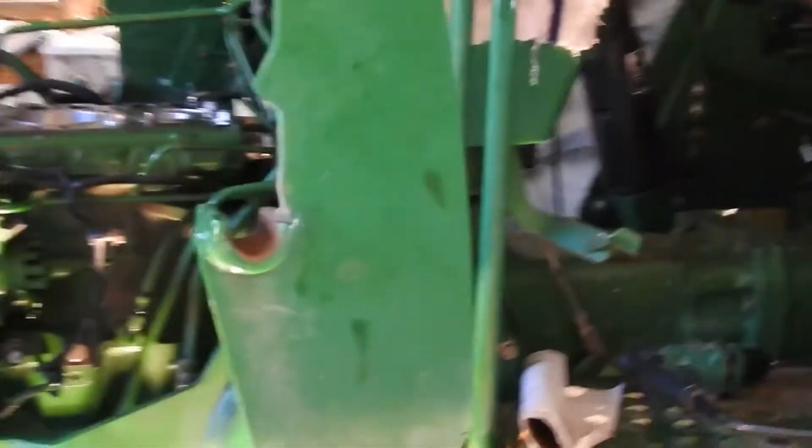Alright, well, anyway, back here working on the tractor, the 5065E John Deere, in the middle of an engine rebuild. Where I am now is that I'm putting the pistons in. We got the liners in. Time for the pistons. I already have 2 pistons in. As you can see, I got the number 3 in, and I got the number 1 in, and I have bolted them down on the underside. I'm going to do one for you.

As you can see, I put these bolts in here. They're only 1-inch bolts, but if you get a washer, you'll see a lot of guys online tell you this, and that's where I learned it: you bolt these down, just snug them down, and it basically keeps the liners in place, because below you have to turn the crankshaft to move it away from where you're putting the piston in. You got to turn these, so it could push out one of the liners. So they just recommend that you put in bolts just to keep those liners down.

You can see the washer actually just goes over the liner there and there, there and there, there and there, over here, over there, and over there. So these aren't coming out. I coated the liner with oil. I've already done that. And so we're going to go over and prepare a piston for insertion.

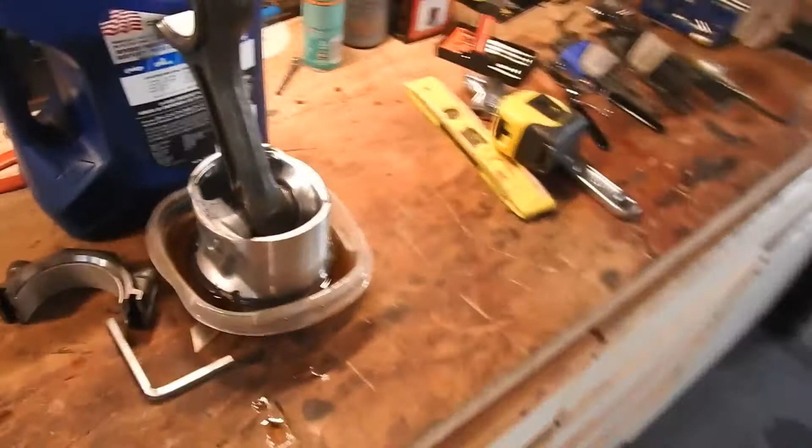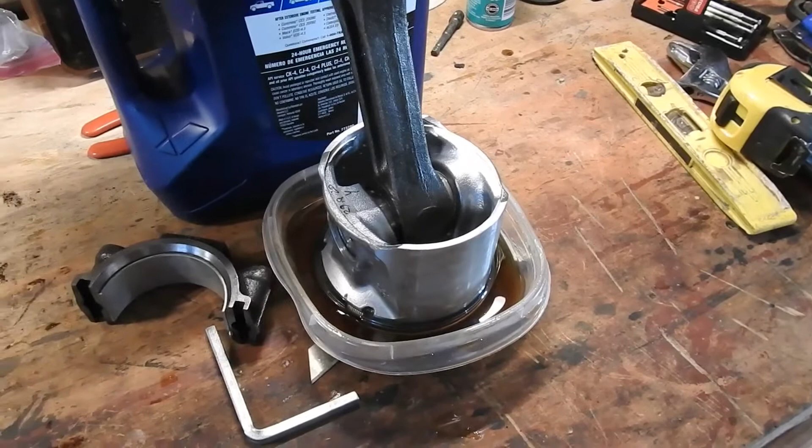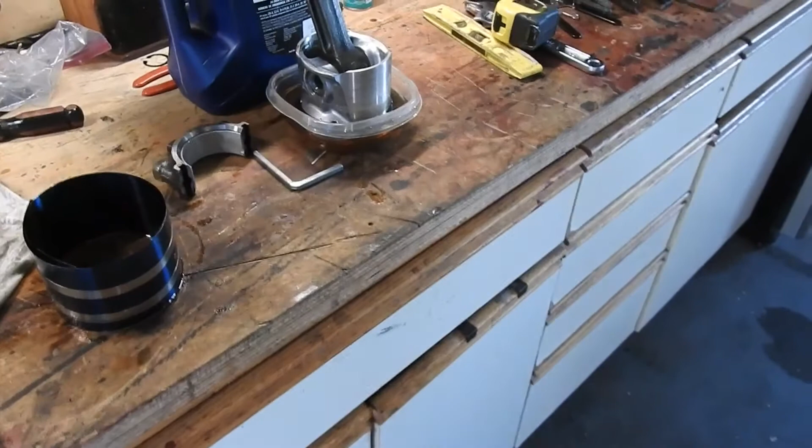So what you can see here is I do have the piston. That's the number 2. I have it soaking in oil. I have the rings soaking in oil. Some old timer told me to do that, or I saw it online, so I'm doing it. I have already changed out the piston. The piston is new. The guide is new. The shaft is existing. The end piece is existing. The bearings on here are new, already done. So that's soaking, okay?

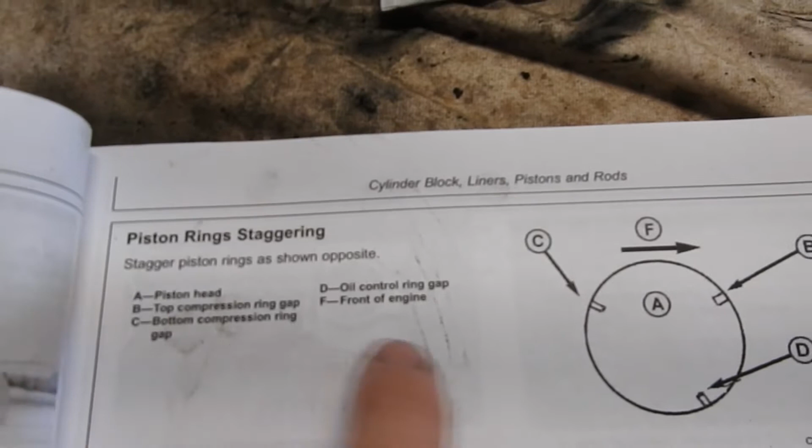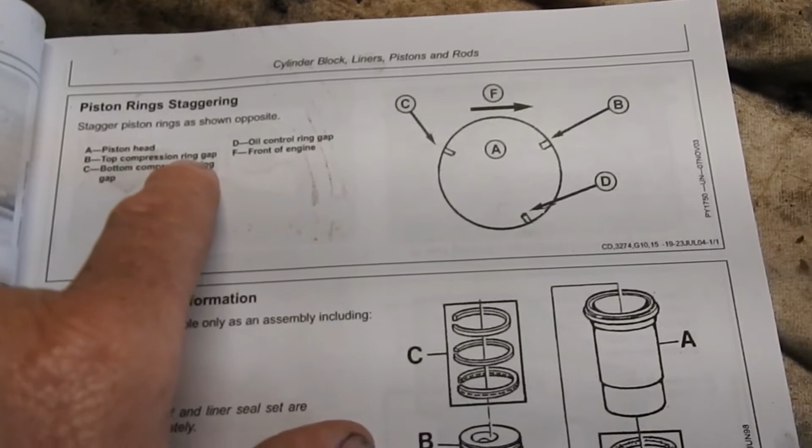One other thing I'll mention is back to the book. It says piston ring staggering. Not drunk staggering, but staggering as offsets. So what they say here is the piston head is A, obviously. B is top compression ring gap. Looking at it from the top with the piston facing front, as in front of the engine, they want you to put the ring gap here, and then the bottom ring gap, because there are 3 rings, on the opposite side, and then they want the oil control ring to be down here. You want to stagger them.

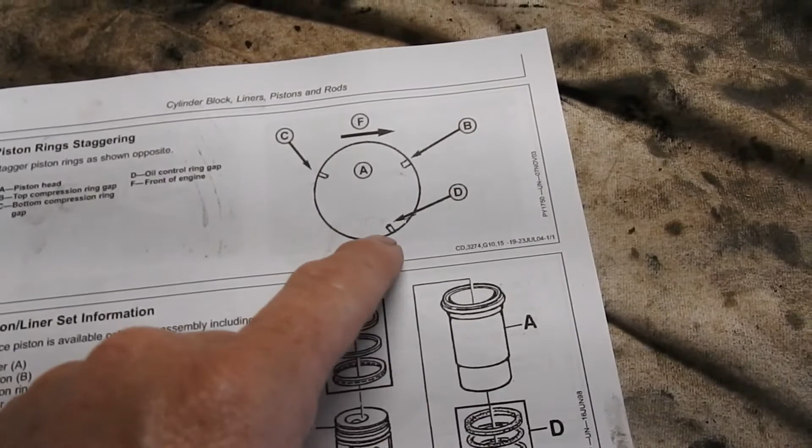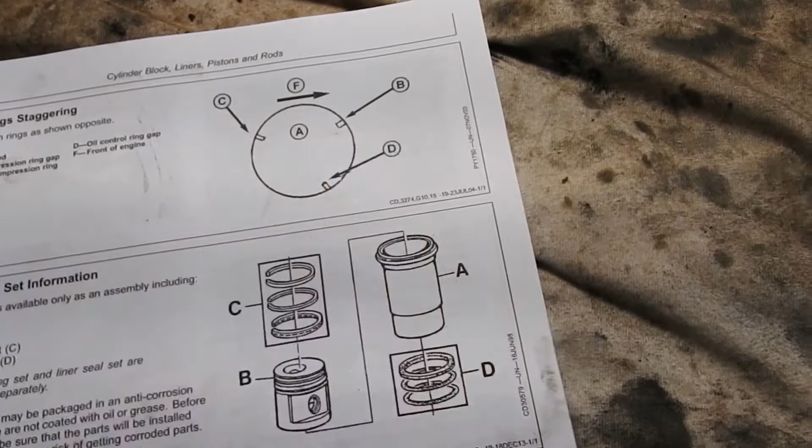It makes sense, right? Because you're compressing air in the piston. You want these things offset. So that's how they do it. Notice the guide would run right through here. You don't want to ever put these right above the guides. That was something that was recommended. So that's how they're offset, and that's how I'm going to do it, and you'll see me do that.

And then I will put it in the piston compression tool. These are like $10. I got this on Amazon for $10. It works pretty well. And then we'll come over here and we will get it in there and tap it in.

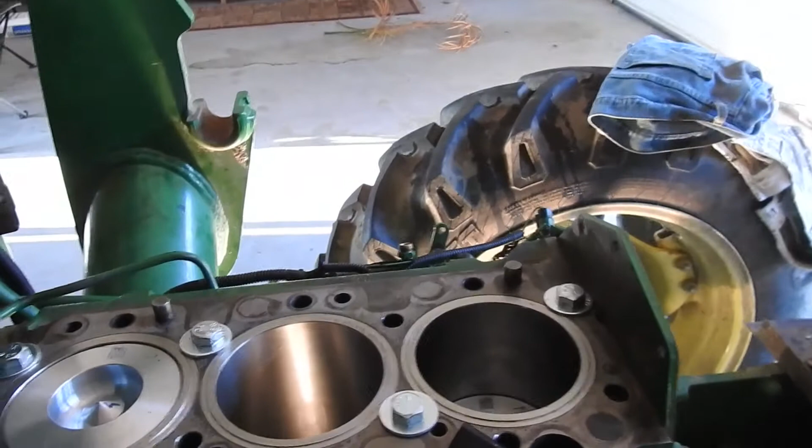First thing I want to do is, if you look in here, I took the tape off the crankshaft. It's called a rod journal. I think before I was calling it something else, but that's the crankshaft journal that accepts the number 2. You can see it's pushed. I want to push it down a little more.

So I'm going to get my crescent, or my ratchet here. Okay, where's my socket that I like? Here you go. This is the socket. Get the socket here. Okay.

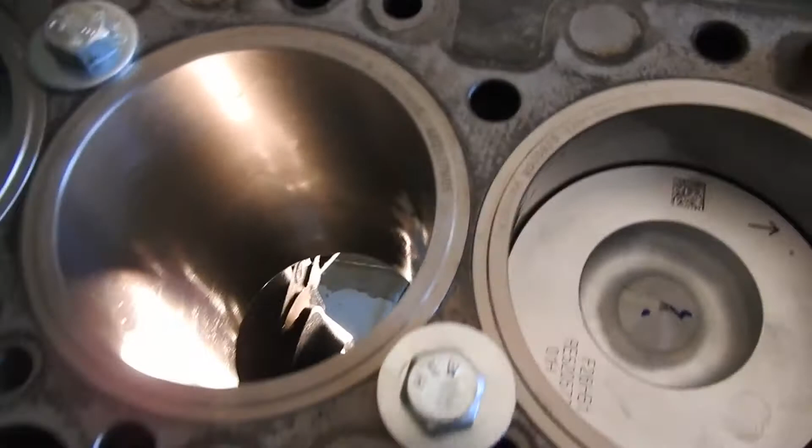Alright, I'm gonna put this on the front so I can turn the crankshaft. Okay, so I'm just gonna look in here and figure out. Keep turning it. It's coming up and around. I want it to be all the way down because I don't want my piston shaft to go down, and then I'm trying to pound the rest of the piston in, and it's banging into that. So I want that down as far as possible. Let me see if I can get it a little more. There we go. All right, that's pretty far down there. Okay, so done. Got that out of the way.

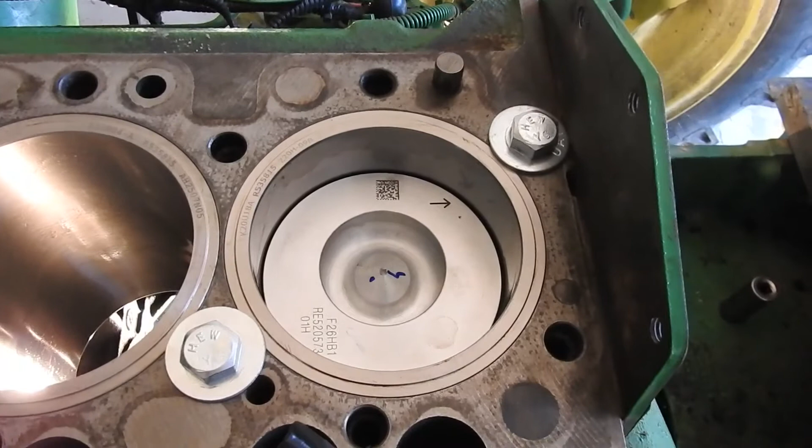Okay, I did the number 1 and the number 3 already. The number 1 was a little more of a pain in the ass because the oil pump is in the way, and I didn't want to take it off down there. So anyway, I figured I'm going to show you guys the number 2 just because it's the easiest to get in, most convenient. So let's go back over here. So I have that prepared now. Took the tape off. I cleaned off the glue from the tape with some brake cleaner and got that done. So we're in good shape there.

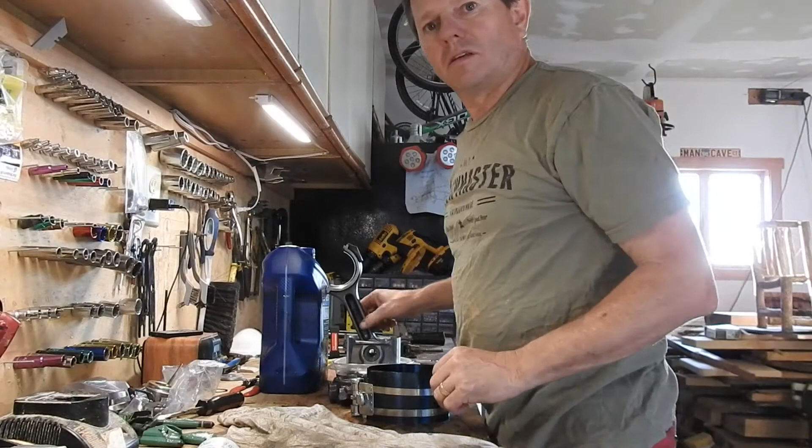So, all right, let me get the camera set up just right here. Hopefully I can prop that up. Okay. Can you see me? Okay, I think you can see me. Okay, so here we go.

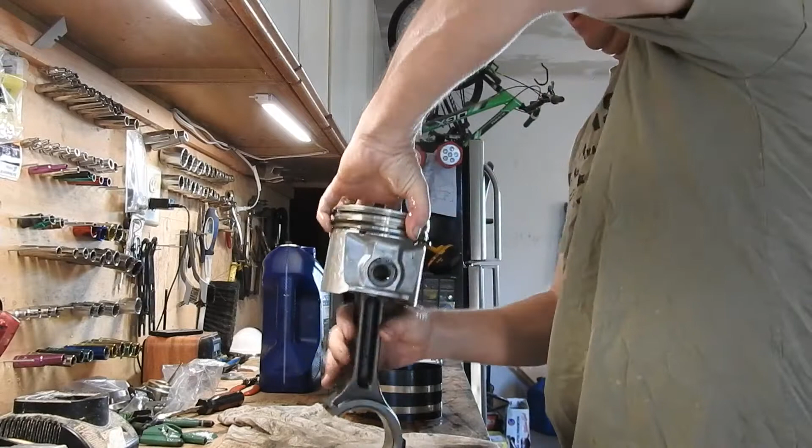I'm going to take the piston out. We are going to let that drip dry for a minute. Get some of that oil off of there. You know, it's good to take a little bit of that and just rub it on the piston itself. Just get a little bit of oil on there. Get that ready to go there. Okay. Now, I'm going to position this piston just like in the manual. Front is that way.

All right, and then I'm going to adjust these. Again, the top compression ring is at 2 o'clock. I'm going to put that at 2 o'clock there. The bottom compression ring is at 11 o'clock, so I'm going to turn that back. Okay, right about there. And then the middle one is down at, I'll call it 5 o'clock. So let me go turn that one down to 5 o'clock here. Just give me a second.

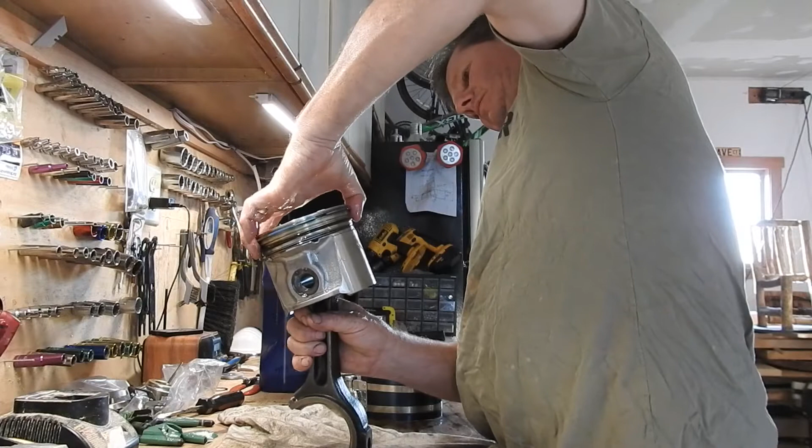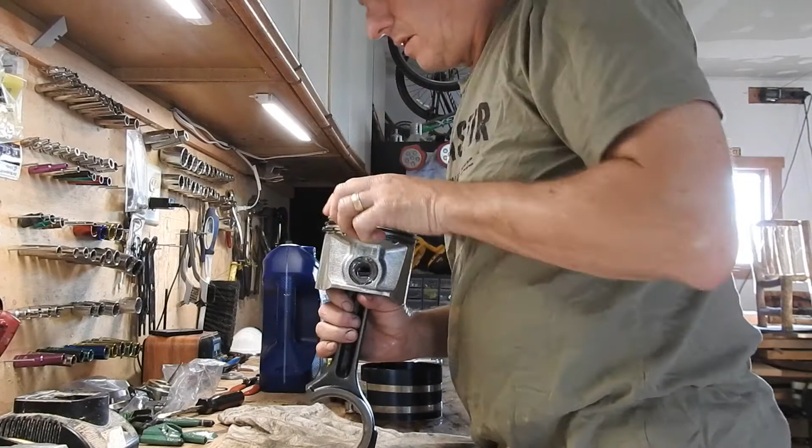It's 5 o'clock. Top one has moved on me, so I'm going to go 2 o'clock with that one. Right? And then the other one is at 11 o'clock. And it's facing towards the refrigerator over there for the front of the tractor. Okay, so that's good. So I got them in the configuration I need.

Now, what I'm going to do is just turn this over in my guide, or this is the piston compression tool. I'm just going to push on it a little bit to get that in there, like so. And then let's tighten that baby down. Try not to get it to turn on you because you don't want the rings to move. I'm trying to do my best to keep this in the same spot, which I think I'm doing here. Alright, so there you go.

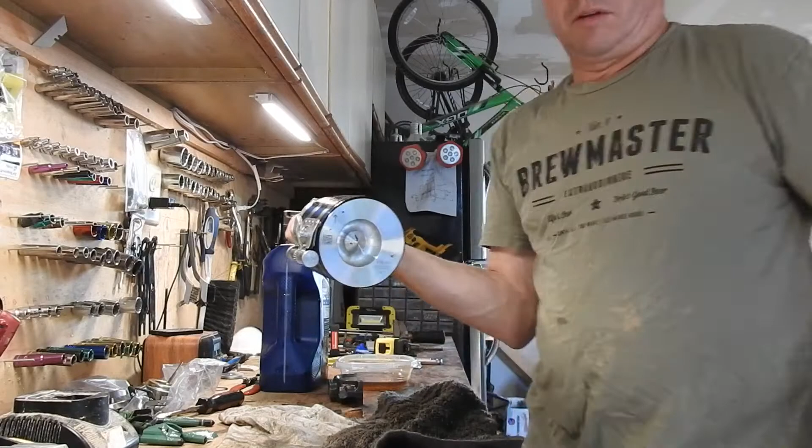Then I'm going to take a rag. I'm just going to clean off the top of this piston here. Alright. And I think we're ready to go. So let's go over to the tractor. You can see how that goes on there. Pretty simple. Tighten it down.

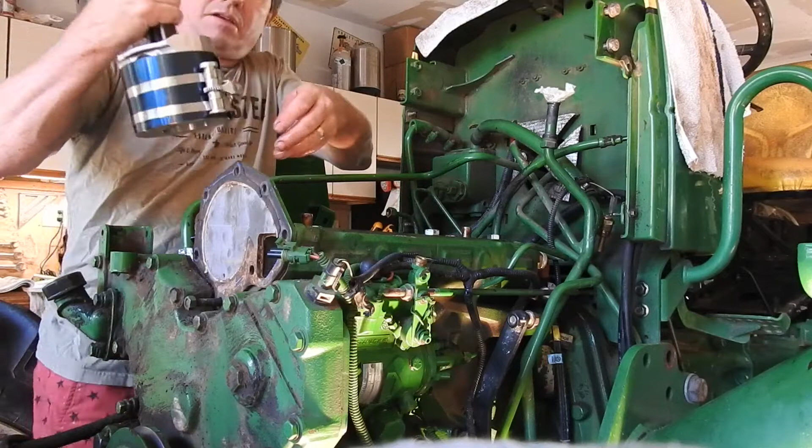Here we go. Okay. So, here we go with this guy. So I'm going to look at this. Which way is front? Okay. This way is front. So we're going to start her slowly in there. Just like that. Now it's just pretty much resting on the compression tool. It just sits almost perfectly over the piston.

And I'm going to, let me see if I can get you up a little higher. Maybe that's a little bit better for you. Okay. So here we go.

Just tap it. I'm also pushing and tapping at the same time, making sure to not pick up on that liner tool. It started to move on me a little. I'm going to tap it back down. Did it come out on me? Let's see it yet. Sounds like it did.

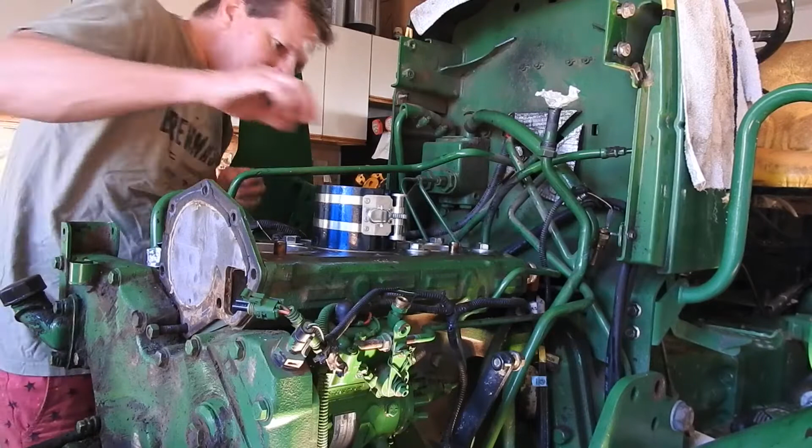Let me check underneath and see if it's touching something there. I don't think it is, but I'll look anyway. Nope, it's not. So,

well, look at that, a ring popped out on me. Yeah, the top ring popped out on me, so maybe, just maybe, I can keep this going if I can loosen this up just a touch. I'll show you here in just a second where that ring popped out. I'm hoping I can save this without having to pull it all the way out.

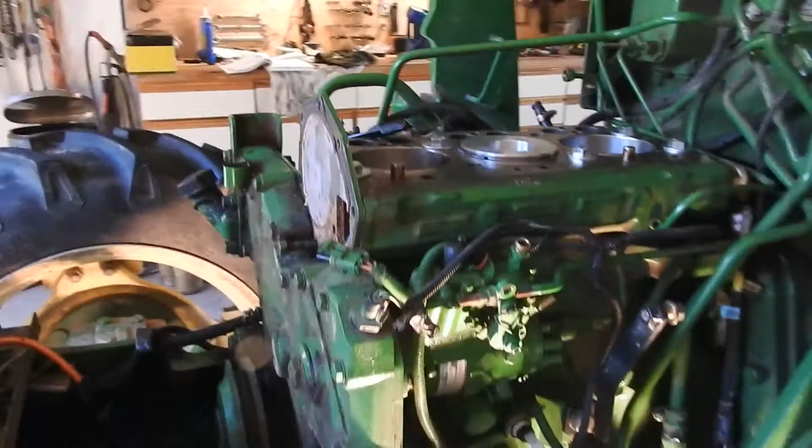See how that top ring popped out there? I'm going to try and compress that again and push it in. So let me try that. See if I can get her. If not, I'll just pull the damn thing out and get it again.

Loosen this back up. I'm going to push up on the piston a little bit to relieve the stress on the ring. There you go. So I pushed up just a little bit, and I just got to compress this one ring right here. Let's see if I can make this happen.

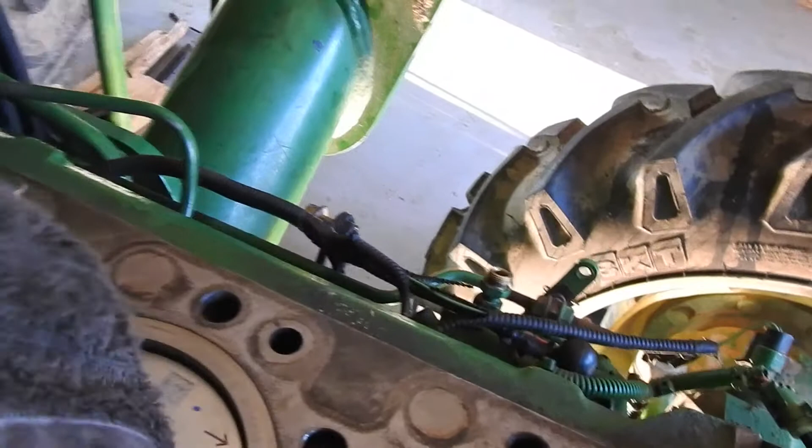Okay, let's see. Ha-ha-ha! Voila! Look at that. In she goes! Alrighty, let's check it out. So, I got it in there. See the arrows facing towards the front of the machine, all of them, right? And that is in. I will just grab a rag here, clean that up a little bit, get some of the oil and crap off of it there. Alright, looks pretty good. So we got it in.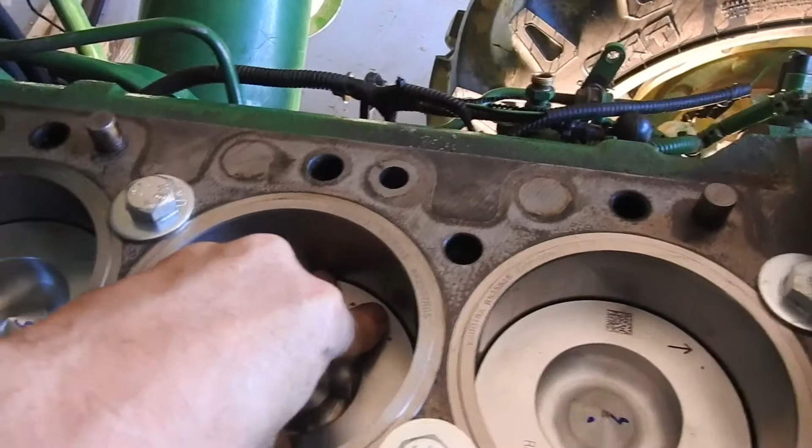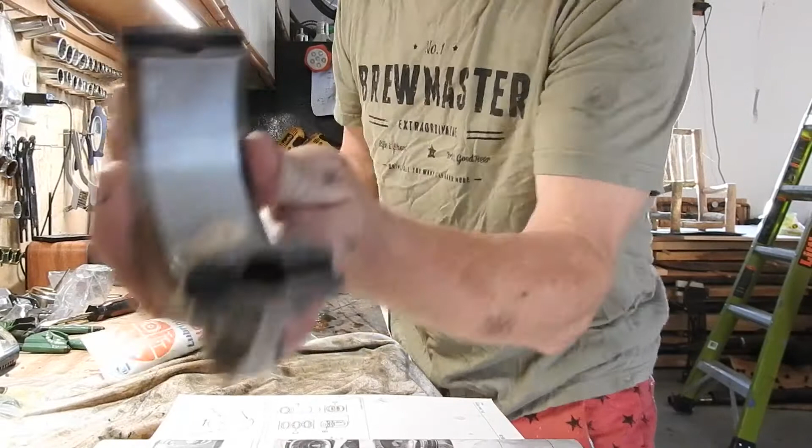Now we can actually take this and push it down to where the crankshaft is down below. Now I'll go under, we'll check this out and get this taken care of. So I'm going to come over here, grab this guy. What I will do is I will clean this bearing. This is a new bearing that's in here. I'm going to take my lovely lubricant. Where the heck are you? My Lubriplate 105. Just put a squirt in there just like that. And just spread that around.

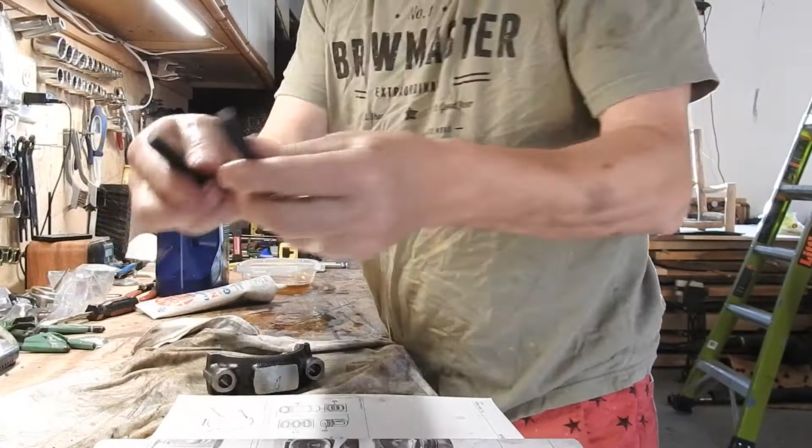Right? Next thing is to take my two brand new bolts, and I will cut those open. These are to hold the piston on the crankshaft. Brand new. And I will go underneath and we will install this puppy. Alright.

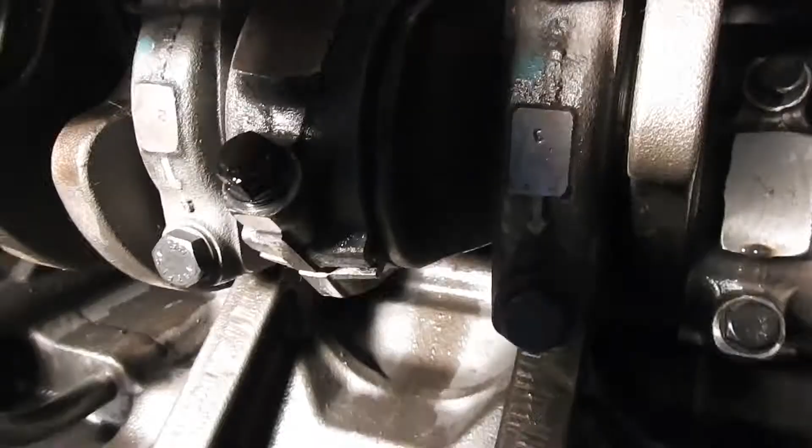You don't want to crank one down and not the other. You want to evenly crank them down over both grooves. That one's probably a little too tight, so I'm gonna loosen that one up because you want them both started in each groove. That one actually popped on a little bit. This one popped off, so they're about even. Now, if you start cranking them down, do a couple turns on this one, couple turns on this one. This will push in and the grooves will close. You don't want to just crank on one side though. Okay, so I'm going to get that done.

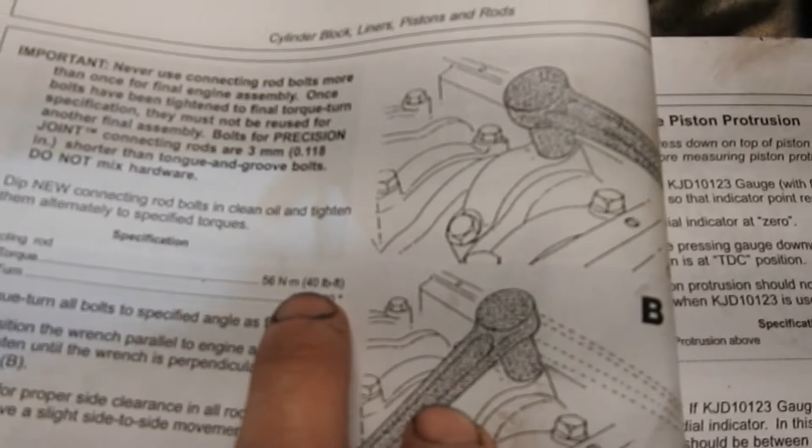Okay, now that I'm done underneath with the piston shafts and putting the caps and the screws on, I just wanted to show you one thing. Coming back to the manual here, there's a torque requirement for those bolts. When you're putting the pistons on the crankshaft, those 2 bolts, they're new bolts. 40 pound-feet. So torque the bolts down to 40 pound-feet, and then do a torque turn of 90 to 100 degrees.

So what that means is you're going to torque these down. You need a torque wrench, obviously. You torque them to 40 pounds, and then after that, see the ratchet on here? You want to turn it like this. You're going to start like that, turn 90 degrees, and you're done with a ratchet. So it's 40 pound-feet plus a torque turn of 90 degrees for each bolt. Okay, that is done. I did that.

Now, moving on, I'm back over here to the piston head, and I've already cleaned out the cam followers. Remember, the cylinder head goes on here, and the push rod goes down through the cylinder head into here, and the camshaft turns, and that's what allows the valves to go up and down. For each one of these valves on the camshaft, there's like an elliptical surface. So as they come around, that point where my 2 fingers are pushes the push rod up, which in turn puts the valve under tension. Okay, so if you look in here?

So the first thing I did was I cleaned out the cam followers that accept the push rods. You can always just reach your finger in here and you can pull them out. So what you want to do is you want to take these out. I already used brake cleaner on them. Spray them, get all the gunk out of the middle, clean them up, put a little bit of oil back on them, and then set them back in here.